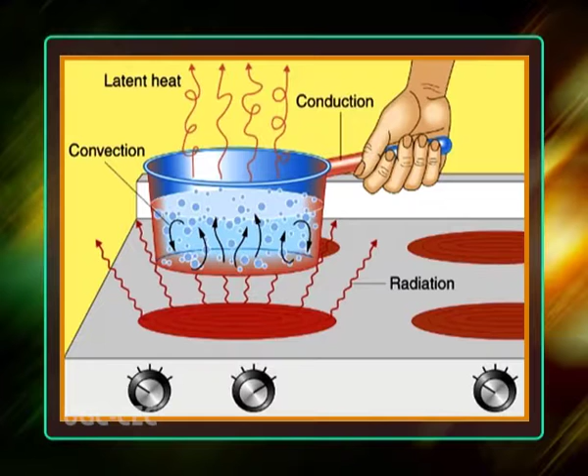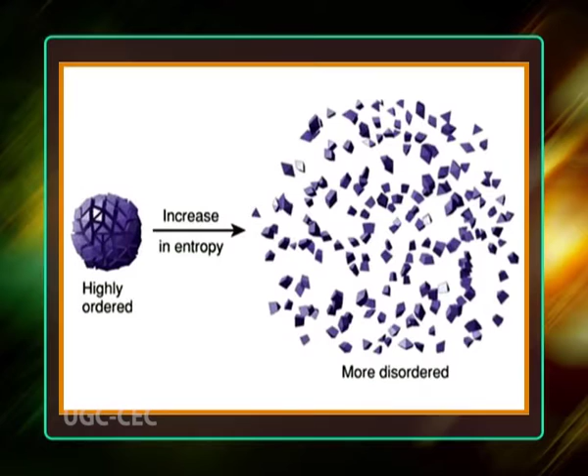Now, we will start with the introduction about the concept of thermodynamics. Thermodynamics is the branch of physics that deals with the relationships between heat and other forms of energy. In particular, it describes how thermal energy is converted to and from other forms of energy and how it affects matter. It defines macroscopic variables such as internal energy, entropy, and pressure that partly describe a body of matter or

radiation. It states that the behavior of those variables is subject to general constraints that are common to all materials beyond the peculiar properties of particular materials. These general constraints are expressed in the four laws of thermodynamics.

Thermodynamics describes the bulk behavior of the body, not the microscopic behaviors of the very large numbers of its microscopic constituents such as molecules. The basic results of thermodynamics rely on the existence of idealized states of thermodynamic equilibrium. Its laws are explained by statistical mechanics in terms of the microscopic constituents. Thermodynamics applies to a wide variety of topics in science and engineering, especially physical chemistry, chemical engineering, and mechanical engineering.

There are three principal laws of thermodynamics. Each law leads to the definition of thermodynamic properties which help us to understand and predict the operation of a physical system. A system undergoes a thermodynamic process when there is some sort of energetic change within the system, generally associated with changes in pressure, volume, internal energy, that is temperature, or any sort of heat transfer.

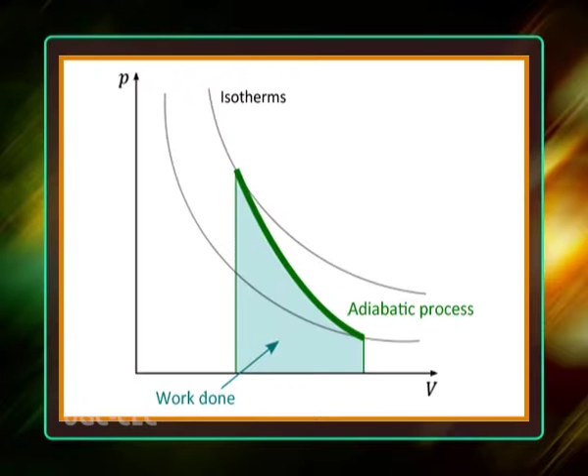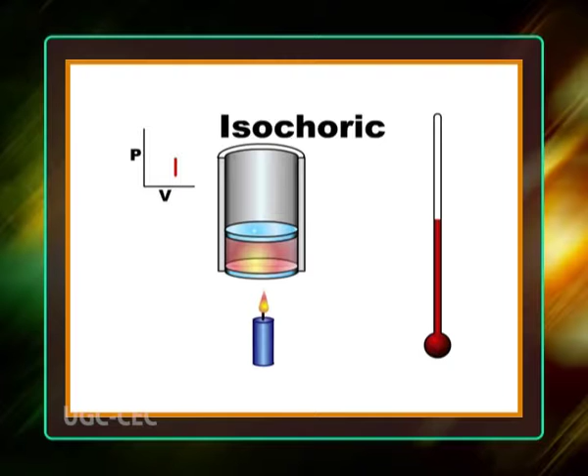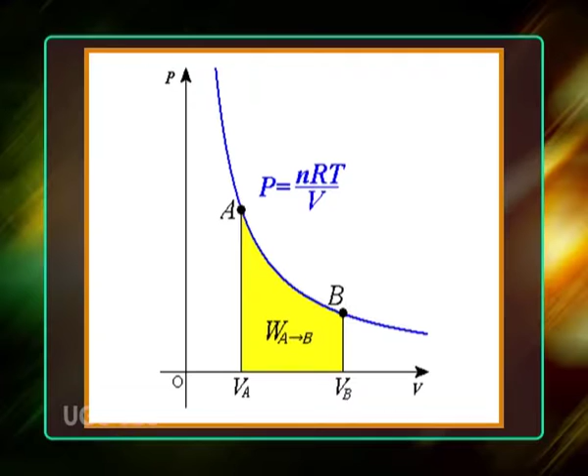There are several specific types of thermodynamic processes that have special properties. Number first is the adiabatic process, which is a process with no heat transfer into or out of the system. Number second is the isochoric process, which is a process with no change in volume, in which case the system does no work. Number third is the isobaric process, which is a process with no change in pressure. And last is the isothermal process, which is a process with no change in temperature.

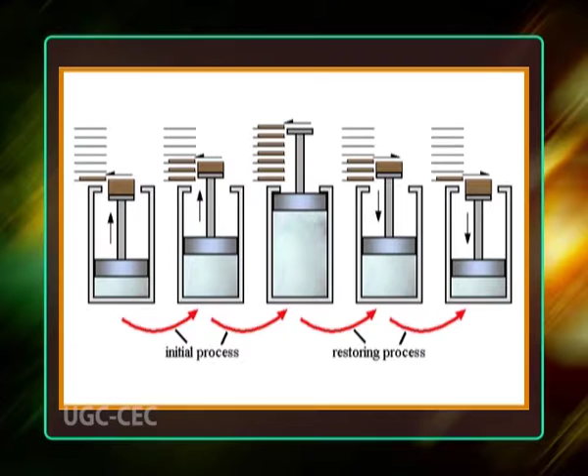Now that we have understood the concept of thermodynamics, let us now try to learn about second law of thermodynamics. The second law of thermodynamics states that for a thermodynamically defined process to actually occur, the sum of the entropies of the participating bodies must increase. In an idealized limiting case, that of a reversible process, this sum remains unchanged.

A thermodynamically defined process consists of transfers of matter and energy between bodies of matter and radiation, each participating body being initially in its own state of internal thermodynamic equilibrium. The second law is an empirical finding that has been accepted as an axiom of thermodynamic theory. Statistical thermodynamics, classical or quantum, explains the microscopic origin of the law.

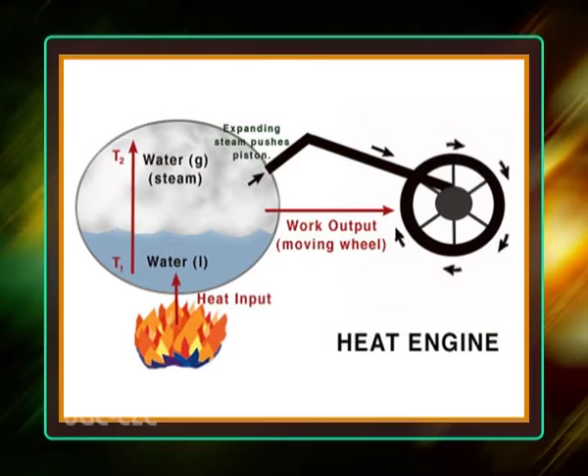The second law has been expressed in many ways. Its first formulation is credited to the French scientist Sadi Carnot in 1824. Carnot showed that there is an upper limit to the efficiency of conversion of heat to work in a cyclic heat engine operating between two given temperatures.

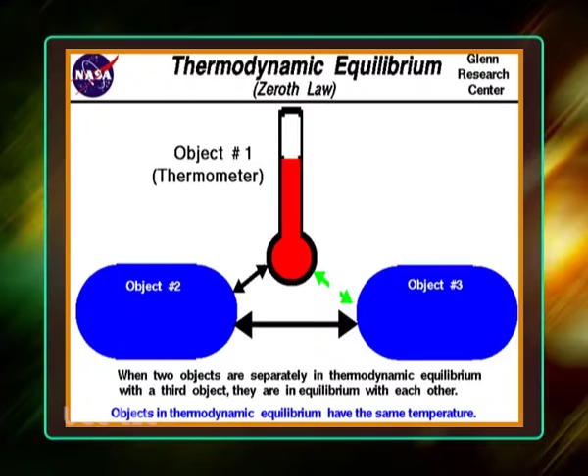Now, let us discuss the various statements of second law of thermodynamics. The historical origin of the second law of thermodynamics was in Carnot's principle. It refers to a cycle of a Carnot heat engine fictively operating in the limiting mode of extreme slowness known as quasi-static, so that the heat and work transfers are between subsystems that are always in their own internal states of thermodynamic equilibrium. The Carnot engine is an idealized device of special interest to engineers who are concerned with the

efficiency of heat engines. Carnot's principle was recognized by Carnot at a time when the caloric theory of heat was seriously considered, before the recognition of the first law of thermodynamics and before the mathematical expression of the concept of entropy. Interpreted in the light of the first law, it is physically equivalent to the second law of thermodynamics and remains valid today. It states, the efficiency of a quasi-static or reversible Carnot cycle depends only on the temperatures of the two heat reservoirs and is the same whatever the working substance. A Carnot engine operating in this way is the most efficient possible heat engine using those two temperatures.

Now coming to the Clausius statement. The German scientist Rudolf Clausius laid the foundation for the second law of thermodynamics in 1850 by examining the relation between heat transfer and work. His formulation of the second law, which was published in German in 1854, is known as the Clausius statement, which is described as: heat can never pass from a colder to a warmer body without some other change connected therewith occurring at the same time. Next is the Kelvin statement.

Now let us discuss the next part of today's lecture, that is the Carnot cycle. The Carnot cycle is a theoretical thermodynamic cycle proposed by Nicolas Léonard Sadi Carnot in 1824 and expanded upon by others in the 1830s and 1840s. It provides an upper limit on the efficiency that any classical thermodynamic engine can achieve during the conversion of thermal energy into work, or conversely the efficiency of a refrigeration system in creating a temperature difference by the application of work to the system.

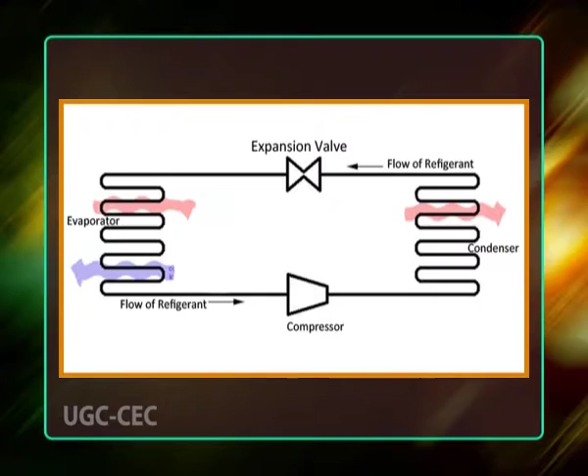It is not an actual thermodynamic cycle, but is a theoretical construct. A system undergoing a Carnot cycle is called a Carnot heat engine, although such a perfect engine is only a theoretical construct and cannot be built in practice. The Carnot cycle, when acting as a heat engine, consists of the following steps.

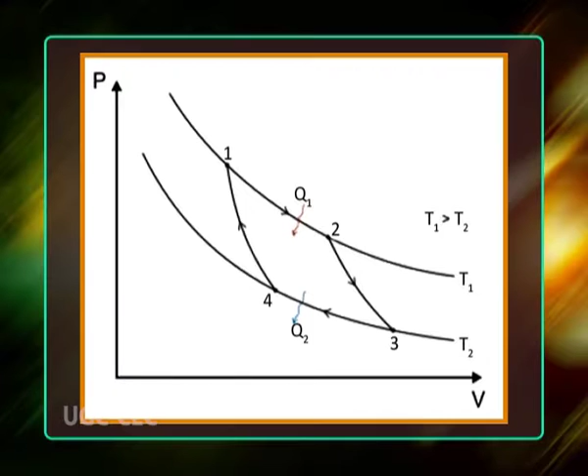When the Carnot cycle is plotted on a pressure volume diagram, the isothermal stages follow the isotherm lines for the working fluid. Adiabatic stages move between isotherms and the area bounded by the complete cycle path represents the total work that can be done during one cycle.

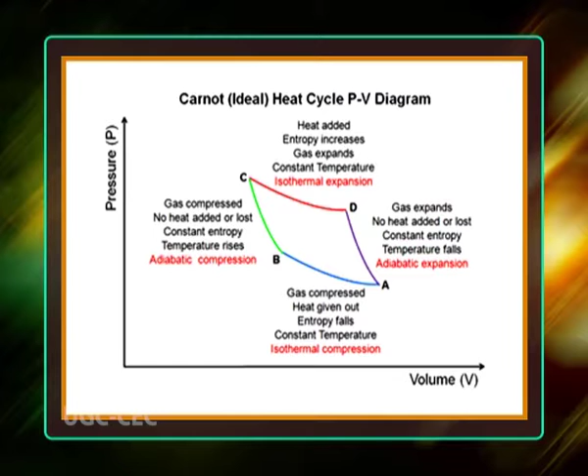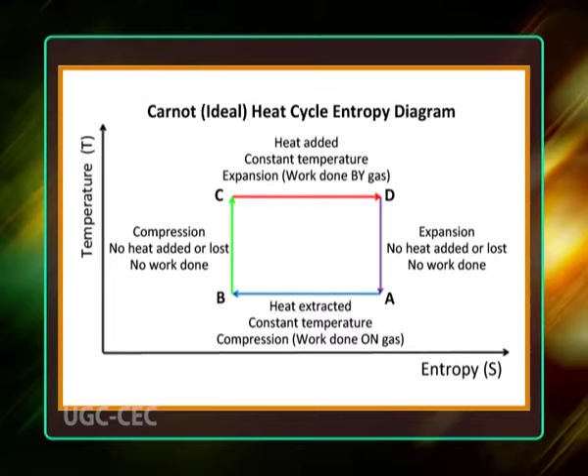Now, let us discuss the temperature entropy diagram. The behavior of a Carnot engine or refrigerator is best understood by using a temperature entropy diagram or TS diagram, in which the thermodynamic state is specified by a point on a graph with entropy S as the horizontal axis and temperature T as the vertical axis.

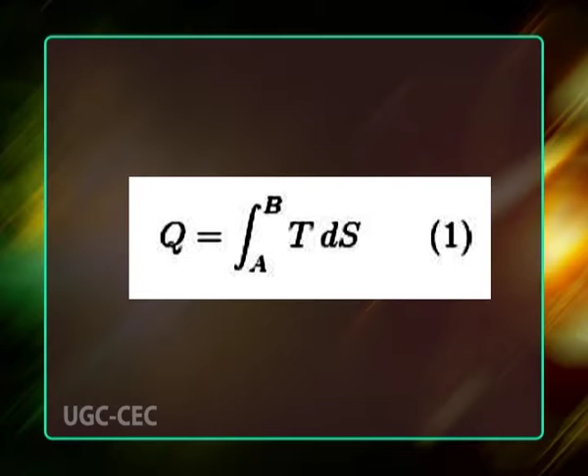For a simple system with a fixed number of particles, any point on the graph will represent a particular state of the system. A thermodynamic process will consist of a curve connecting an initial state A and a final state B. The area under the curve will be Q equals the integral from A to B of T dS, which is the amount of thermal energy transferred in the process.

Now, let us discuss the next part of today's lecture, that is entropy.

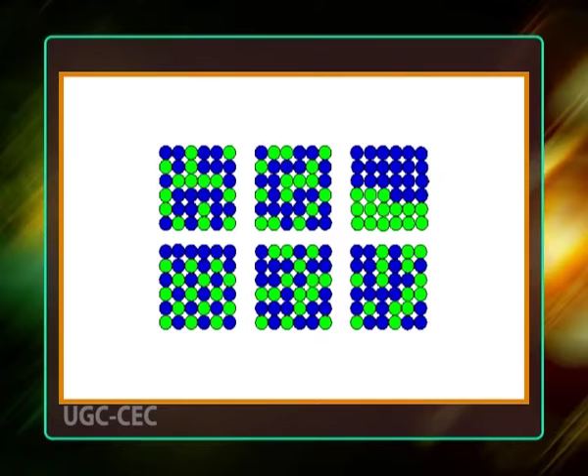In thermodynamics, entropy is a measure of the number of specific realizations or microstates that may realize a thermodynamic system in a defined state specified by macroscopic variables. Most understand entropy as a measure of molecular disorder within a macroscopic system.

The second law of thermodynamics states that an isolated system's entropy never decreases. Such a system spontaneously evolves towards thermodynamic equilibrium, that is the state with maximum entropy. Non-isolated systems may lose entropy provided they increase their environment's entropy by that increment.

Since entropy is a state function, the change in entropy of a system is constant for any process with known initial and final states. This applies whether the process is reversible or irreversible. However, irreversible processes increase the combined entropy of the system and its environment.

The change in entropy ΔS of a system was originally defined for a thermodynamically reversible process as ΔS = Σ δQrev / T, where T is the absolute temperature of the system dividing an incremental reversible transfer of heat into that system. If heat is transferred out, the sign would be reversed, giving a decrease in entropy of the system.

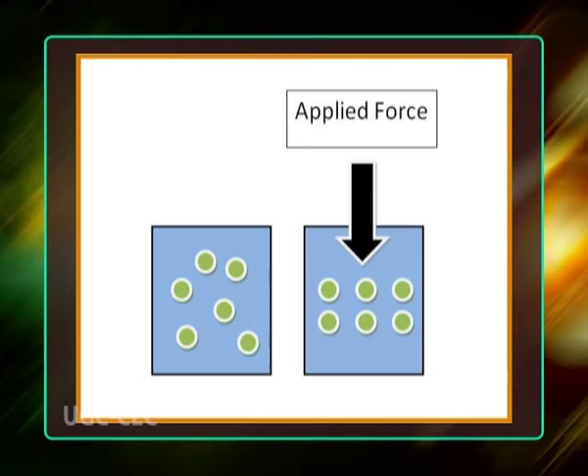In the classical thermodynamics viewpoint, the system is composed of a very large number of constituent atoms or molecules, and the state of the system is described by the average thermodynamic properties of those constituents. Later, the thermodynamic properties, including entropy, were given an alternative definition in terms of the statistics of the motions of the microscopic constituents of a system, modeled at first classically, for example, Newtonian particles constituting a gas, and later quantum mechanically, that is photons, phonons, spins, etc.

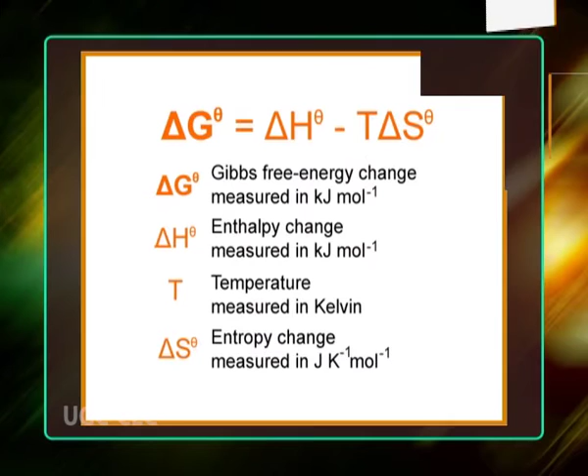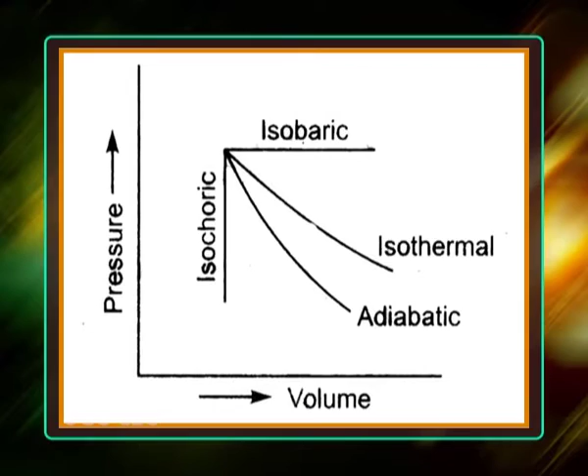Now, let us discuss the last part of our today's lecture, that is Gibbs free energy. In thermodynamics, the Gibbs free energy is a thermodynamic potential that measures the maximum or reversible work that may be performed by a thermodynamic system at a constant temperature and pressure, that is isothermal and isobaric. Just as in mechanics, where potential energy is defined as capacity to do work, similarly different potentials have different meanings.

The Gibbs free energy is the maximum amount of non-expansion work that can be extracted from a thermodynamically closed system, that is one that can exchange heat and work with its surroundings but not matter, and this maximum can be attained only in a completely reversible process.

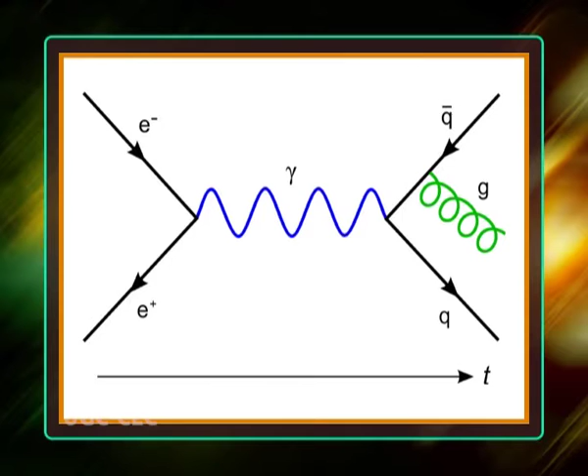When a system changes from a well-defined initial state to a well-defined final state, the Gibbs free energy change ΔG equals the work exchanged by the system with its surroundings minus the work of the pressure forces during a reversible transformation of the system from the initial state to the final state. The Gibbs energy, also referred to as capital G, is also the thermodynamic potential that is minimized when a system reaches chemical equilibrium at constant pressure and temperature.

The Gibbs free energy, originally called available energy, was developed in the 1870s by the American mathematician Josiah Willard Gibbs. In 1873, Gibbs described this available energy as the greatest amount of mechanical work which can be obtained from a given quantity of a certain substance in a given initial state without increasing its total volume or allowing heat to pass to or from external bodies, except such as at the close of the processes are left in their initial condition.

The initial state of the body, according to Gibbs, is supposed to be such that the body can be made to pass from it to states of dissipated energy by reversible processes. The Gibbs free energy is defined as G = U + PV − TS, which is the same as G = H − TS, where U is the internal energy, P is the pressure, V is volume, T is temperature, S is entropy, and H is the enthalpy.

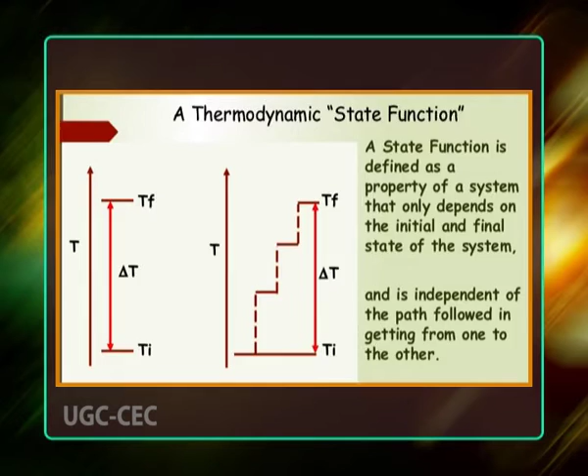The Gibbs free energy of the system is a state function because it is defined in terms of thermodynamic properties that are state functions. The change in the Gibbs free energy of the system that occurs during a reaction is therefore equal to the change in the enthalpy of the system minus the change in the product of the temperature times the entropy of the system. That is, ΔG = ΔH − Δ(TS). If the reaction is run at constant temperature, this equation can be written as ΔG = ΔH − TΔS.